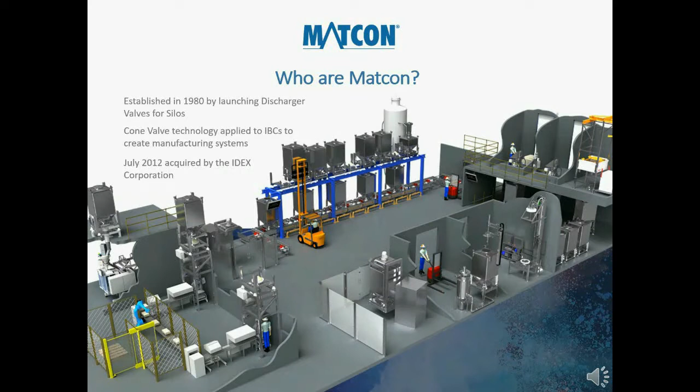Matcon are a powder handling system supplier. It was established in 1980 by launching discharge valves for silos, which were predominantly used in the mineral processing industry. The cone valve technology evolved and was applied to intermediate bulk container systems, or IBCs. These were used for batch production in manufacturing plants around the world. In July 2012, Matcon was acquired by the IDEX Corporation, based in the USA.

Matcon are the originators of cone valve technology. This technology has been used for a number of years and has a lot of benefits to the manufacturing plant. When we discharge the IBCs, the blend homogeneity is maintained, so there's no segregation. We can also handle free-flowing powders, as well as cohesive materials that tend to bridge and rat hole. We can also handle fragile products, such as tablets and cereals. The IBC system is a contained system, so it has dust-free handling, so there's no risk of cross-contamination.

Matcon are part of the IDEX Material Processing Technology Division, or MPT. In that division there are companies in the powder division, which include Matcon, Quadro and Fitzpatrick, and also companies in the liquid division, which include Microfluidics, Quadro and Steridose.

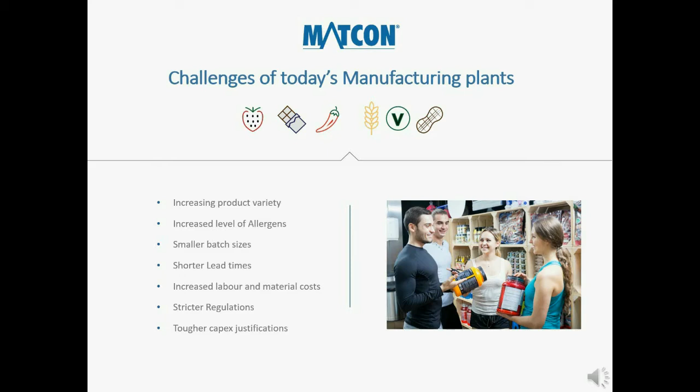The challenges for today's manufacturing plants are quite vast. These include increased product variety, driven by consumer demand. There's an increased level of allergens to handle. The batch sizes are becoming smaller and there's more of them. There's shorter lead times driven by the end client. There's an increased labour and material cost. Stricter regulations driven by regulators such as the FDA and also local regulators. And there's a tougher CapEx justification for capital investment.

Look at applying lean principles to manufacturing. They'll help us identify areas where we can become more efficient. Lean is defined as to maximise the customer's value whilst minimising waste. The wastes are defined by overproduction. This is associated with campaign manufacturing, by producing to stock rather than an order. Waiting time, waiting for a process to be loaded, unloaded and cleaned. Over-processing, using larger equipment than required to produce a smaller batch.

Transportation, unnecessary movement of people and the equipment. And producing defects unnecessarily. The biggest cost to the business is the production of too much inventory, which is associated with manufacturing to stock rather than to an order.

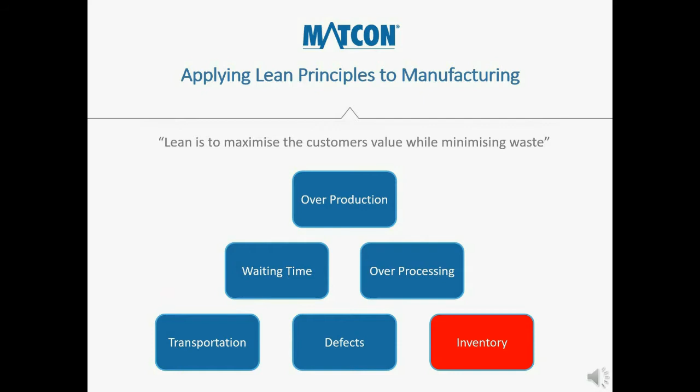Some of the essential lean principles include pull, not push manufacturing, so you're manufacturing to an order rather than to stock. Increasing the overall equipment effectiveness, the OEE. Look at flow manufacturing, like one batch being processed, one batch is waiting to be processed. Reducing the takt time, the time it takes to get from one process to another.

Improving the single minute exchange of die, either changeover time from one recipe to another. Adopting a visual aid, such as a Kanban, in the form of a paper or an automatic system, so that all of the production team are aware of what's being produced when.

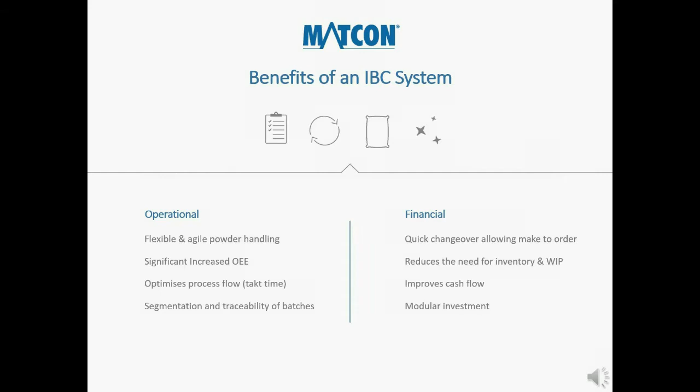Financial benefits include quick changeover, allowing to make to order, reducing the need for inventory and work in progress, improving the company's cash flow. And it's a modular investment, so investment could be made now and in the future. The IBC system is a modular system. It grows as your company grows.

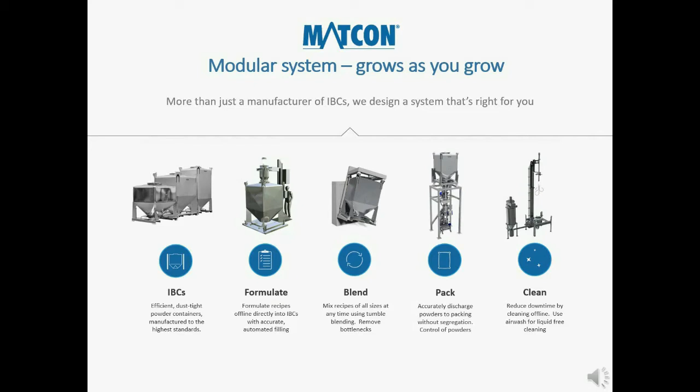The IBCs provide the flexibility in the manufacturing plant, and they're used in different processes such as formulation, blending, packing feed, and they can be cleaned offline. We'll look at these processes in more detail now.

So now we're going to look at ingredient formulation and some of those considerations when we're preparing ingredients for a recipe. Some of the considerations are the production capacity, now and in the future, the number of recipe changeovers, how frequent are they? And it's a good idea to categorize the ingredients into major ingredients, minor ingredients, and also micros, because there'll be no one system that can handle all three.

Also the dosing weight and the accuracy required, and put in a realistic accuracy required for the ingredient formulation. Are there any allergens that are to be handled? The number of SKUs, the raw material packaging form, is it 25 kilo bags, is it bulk bags? Also the flowability of the material, is it cohesive, is it free flowing? And I think we need to look at a sensible level of automation that is required now and in the future.

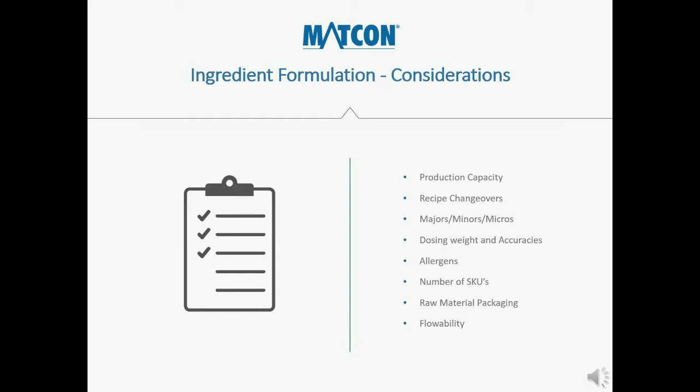There's a high throughput, we can dose up to 2 dosings per minute, and it also provides very good brand security, so the operators aren't aware of the secret formula that is being produced from the system. It also reduces errors that are associated with manual weighing and can be connected to an MES system. We'll just run a short video on the FlexiBatch Micro now.

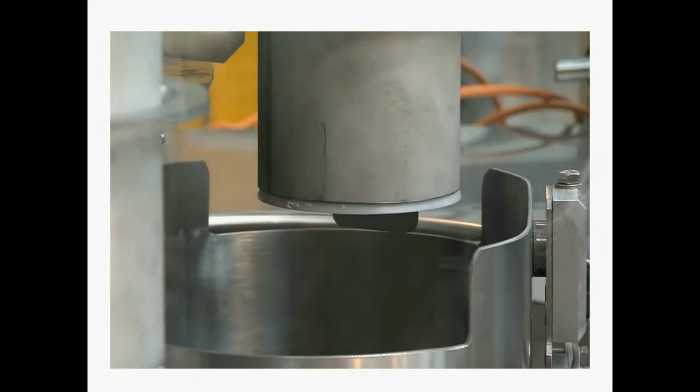This is an automated minor ingredient formulation system called the FlexiBatch. It's recipe controlled formulation which can be downloaded from an MES. This will be suited for dosing ingredients in a weight range of say 10 kilos up to several hundred kilos. There's no human error as is associated with manual weighing.

It's a quick changeover. The IBCs can change with different ingredients depending on what's being made when, and there's a loss in weight or gain in weight dosing system. Multiple ingredients and recipes can be made at the same time. We could also have batch traceability with connection to an MES system. We'll look at a short video on how the FlexiBatch system works now.

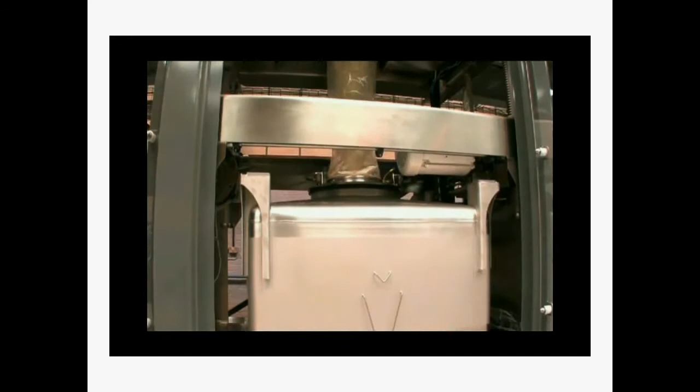So now we're looking at the major ingredient formulation, which can be automatically dosed from hoppers and silos. These ingredients could be starch, MSG, salt - the high running ingredients that are used a lot in the formulation.

It can be automated ingredient batching, so there's no human error. Because we're using the cone valve system for discharging, we have prevention of powder flow issues and mass flow issues, as well as a high degree of accuracy. It can also be connected to an MES system to provide batch traceability.

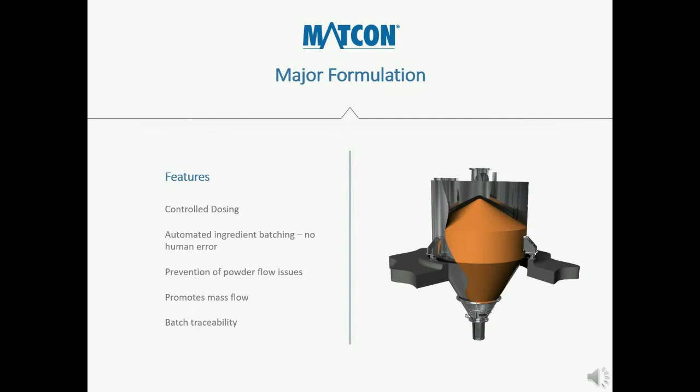These are examples of a FlexiBatch system. You've got the ingredient IBCs above, and they can be loaded up, ready for the shift's production, and changed as the recipe changes as well. Underneath we have a weigh platform with a conveyor which moves along and automatically locates the batch IBC underneath the ingredient IBC, ready to be dosed.

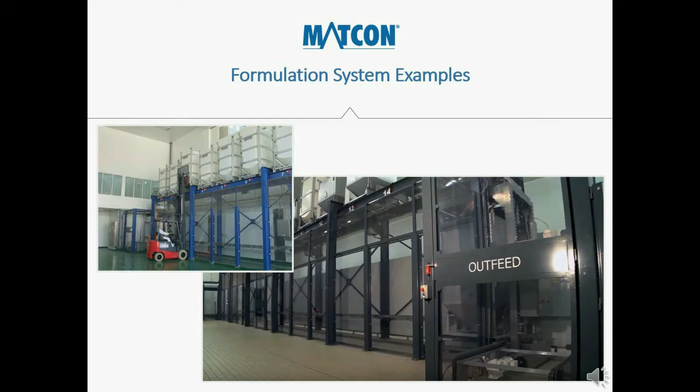This is an example of a customer site handling micros, minors, and also major ingredients. The minors and the micros are added in manually at the sack tipping station, and the major ingredients are dosed into the batch container from a number of hoppers and silos.

Mixing is the first value added process, and it sets one company apart from another. There are considerations when looking at a mixing process: production capacity, the batch size range, ingredient quantities, maximising the OEE so there's no waiting time to be loaded and unloaded and cleaned, and reducing the time between mixing the previous process and the next process.

Are there liquids and oils that need to be added? And what is the process after mixing?

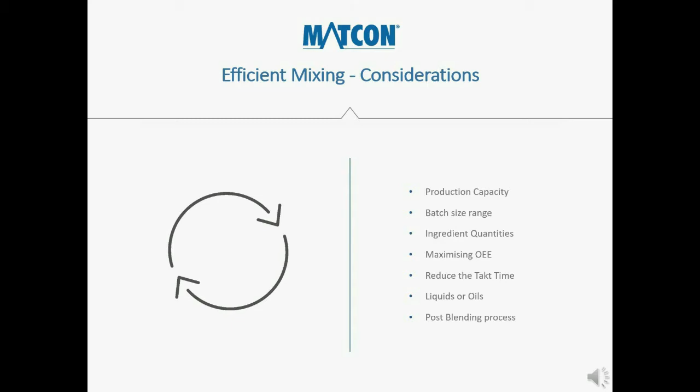Fixed mixers are generally directly coupled to a process above and below. This requires a tall building structure. Recipe changeovers and cleaning take a long time, and they're more suited for campaign manufacturing, where you make the same product range day in, day out.

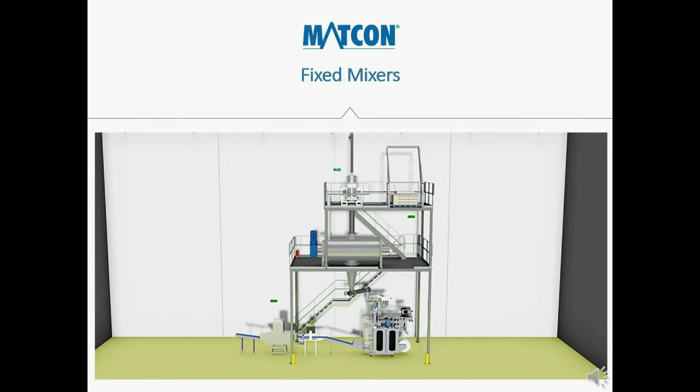The disadvantages of a directly coupled mixing system include the downtime waiting to be loaded, unloaded and cleaned, and health and safety issues, as you need a very tall structure to load the mixer and position the equipment below it. This generally leads to high inventory levels, work in progress and finished goods inventory.

It's labour intensive, very difficult to clean and time consuming. There's a risk of cross-contamination from one ingredient to another. It's quite an inefficient process, as the mixer is not always being used for mixing.

Cleaning validation needs to be done - wet cleaning and drying, then validating that the mixer is cleaned. Also, the fixed mixer generally has an aggressive type of mixing action, so it's not good for certain materials.

The IBC system is used in parallel process production. Each module - the filling of the IBC through sack tips, the IBC blending, feed to packing, and offline cleaning - are all happening in parallel. This allows for high volume manufacturing, flexibility, product integrity, hygiene, and different batch sizes. Traceability can also be built into the process.

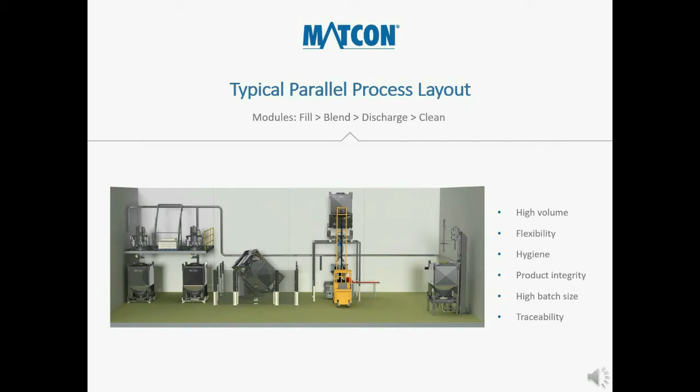Using IBC blending, the IBC is the blending vessel itself - it's loaded, clamped into the blender, blended, then unclamped and removed. This ensures it's a closed system, so there's no risk of cross-contamination and no cleaning of the blender required. This increases the overall efficiency of the mixing process, and the OEE becomes very high.

So we'll just run a short video to show how the IBC blender works.

Some of our recipes may need liquid added or have a high fat content. In this case, the IBC blender doesn't put enough work into the product to mix those thoroughly. So now we have an option for an IBC intensifier lid, which is put onto the lid of the IBC and used in conjunction with the IBC blender to mix those products. This high shear lid can operate up to 3000 RPM.

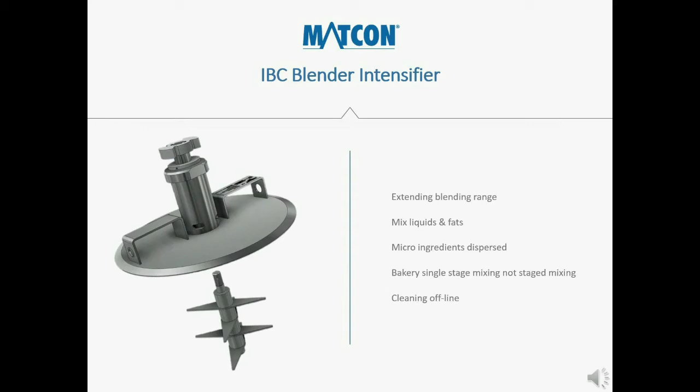We have the ability with the IBC blender to add in liquid and fats during the blend. These are added through a container or drum, and can be pumped in at up to 10 litres a minute, so it's a contained addition during the blend. We use the high shear to mix the powders and the liquid together, with no need to open the blender up and add liquid, potentially risking contamination.

We'll show a video on how the liquid addition system works now.

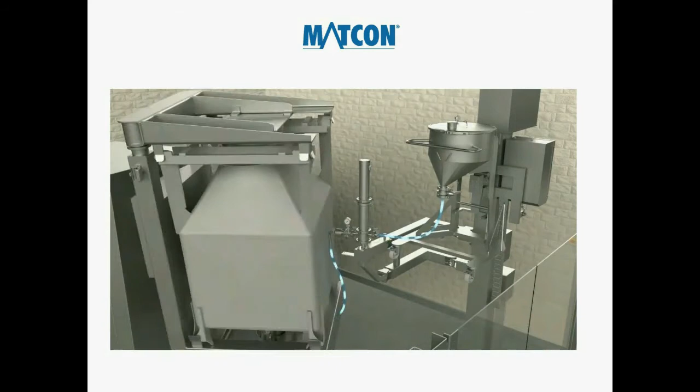We'll look at a comparison between a fixed mixer using a sequential process and an IBC blender using a parallel process. The example we use is a sports nutrition manufacturer, but it could be any manufacturer in any industry, because this is typically what we would see.

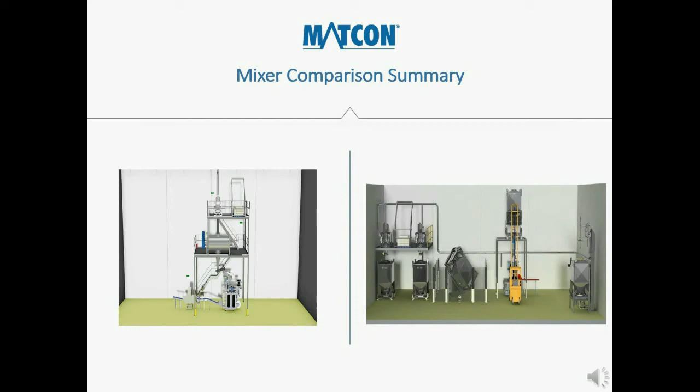Packing feed is a critical part of the process. You need to maintain the blend homogeneity. There needs to be a control feed to the packing machine so you get consistent bulk density and consistent packing weights. The feed system needs to handle different flowing powders, be automated to optimize efficiency, be a dust controlled system, and allow complete discharge. You don't want to leave any product in the process above.

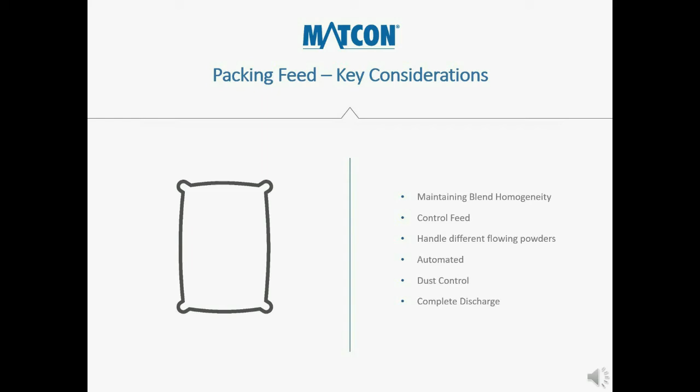Matcon's cone valve discharge technology provides many benefits when we're feeding material to a packing machine. It gives a consistent density of the product by controlling the flow, so you get consistent pack weight in the packing machine. You also don't get any powder handling problems, and it's an automated, dust-free process.

Let's look at a short video on a typical packing feed example now.

As well as automated cone valve discharge, Matcon also has a manual cone valve discharge, where we use a lever to raise the cone valve into the product flow into an IBC. Compared to a butterfly valve system, this can discharge free-flowing powders such as sugars, salt, 3-in-1 beverages, detergents, and plastic granules. Unlike the butterfly valve system, which promotes core flow and can't prevent rat-holing or segregation risk, and can't discharge powder fully, with dusting at the base of the valve underneath the IBC when closed, the manual cone valve system promotes mass flow, preventing rat-holing and segregation, allowing full discharge with a contained powder discharge.

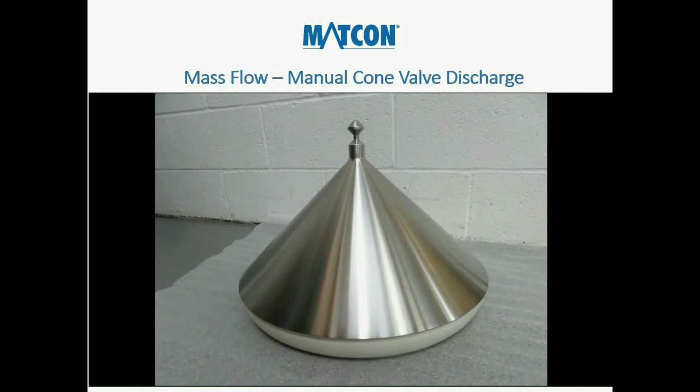This is an example of the IBC cone valve system feeding to packing, and the discharge station for that can be located on a frame above the packing machine or on the floor above. It provides a constant feed to the packing machine to maintain the density, consistency, and quality of the product.

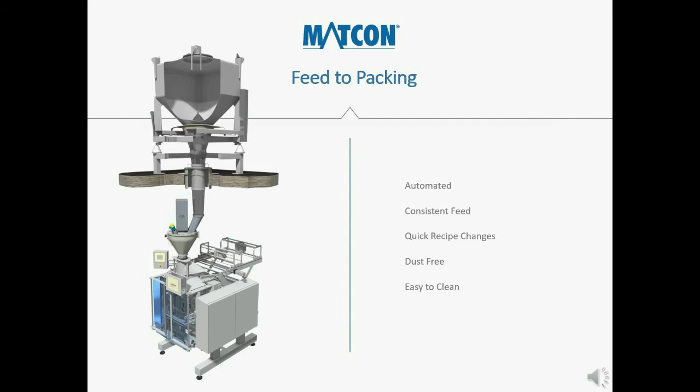This shows a B2B packing system, or a powder packer as we call it. Here we're dosing directly from the IBC into a bag, box, or drum. Typically the packing size would be anything from 5 kilos to 25 kilos, but this is designed to be quick and easy to dismantle, change recipes, and clean.

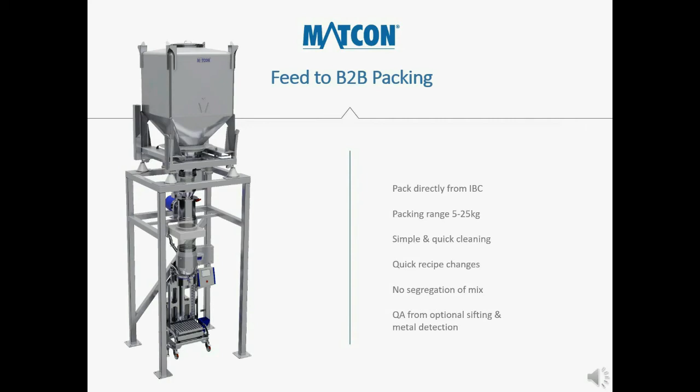In summary, the Matcon IBC cone valve technology is used to maintain blend homogeneity. It can control and discharge free-flowing powders, very sticky cohesive powders, handle fragile products, and it's a dust-free handling system.

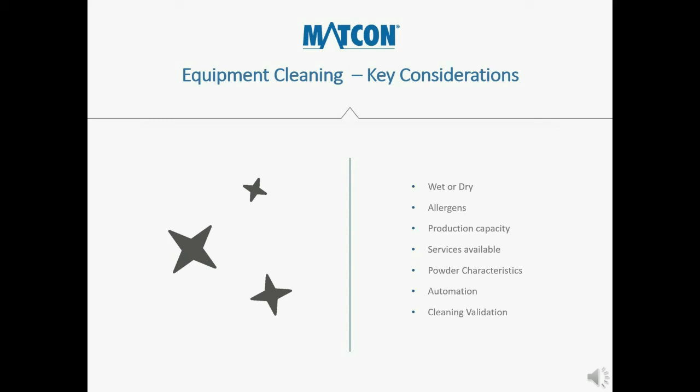Equipment cleaning is obviously a very important part of the process. Some key considerations: some industries, such as dairy and infant formula, stipulate that most cleaning processes need to be dry so there's no risk of bacteria growth, whereas if you're handling allergens and flavours, it needs to be a wet clean to ensure thorough cleaning and drying. You also need to consider production capacity, how many recipe changeovers there are, the powder characteristics, and whether you need to automate the process now or in the future. Also, how does your QA team need to validate the cleaning process, whether it's a swab test or other means. As we mentioned, the IBCs themselves are cleaned offline.

This is an example of an IBC cleaning system with water. This could be manual or fully automated. We're using a high pressure spray ball lowered onto the inlet of the IBC, and we've also got a number of spray nozzles around the cone valve area, which raise and lower the cone valve during the process. This is a validated wash cycle, where we normally rinse the IBC with water, add detergent, do a final rinse, and also do a drying cycle.

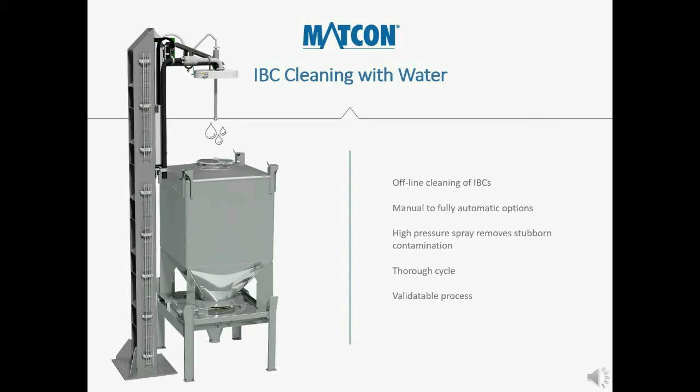As well as the water IBC cleaning system, we have a dry air cleaning system. This is particularly relevant to the dairy industry and infant formula industries, so they can't risk any contamination or bug growth with water, so they much prefer to use dry air. This uses a spray nozzle with a compressed air supply and filter supply that lowers down onto the IBC, and any airborne dust is ejected out of the bottom of the IBC with a dust collection system.

It's a fast cleaning system. Typically this would take 6 to 10 minutes to turn around a clean IBC, and it's a validated process which the QA can use.

So here we show a typical process flow. This is in the beverage industry. This could be a single floor facility or with a mezzanine or frames, showing separate sack tipping of the ingredients into an IBC through a sieve, separate process of IBC blending, feeding to packing and offline cleaning. A very good example of a parallel process efficient plant.

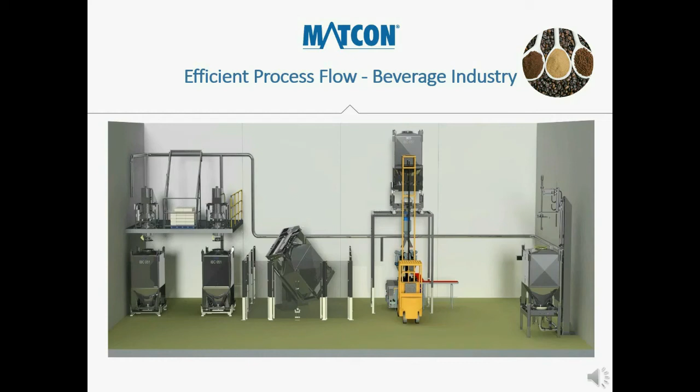Shows an example of an efficient gravity feed plant for an infant formula production. On the top floor, we're separating the zones. We've got the raw materials handling part coming through on the left, through the low hygiene zone to the high care area, where the operators decant the sacks into the IBCs down below in the middle floor. In the middle floor, we've got IBC movement, IBC blending, IBC discharge, and off to the side, we've got IBC washing.

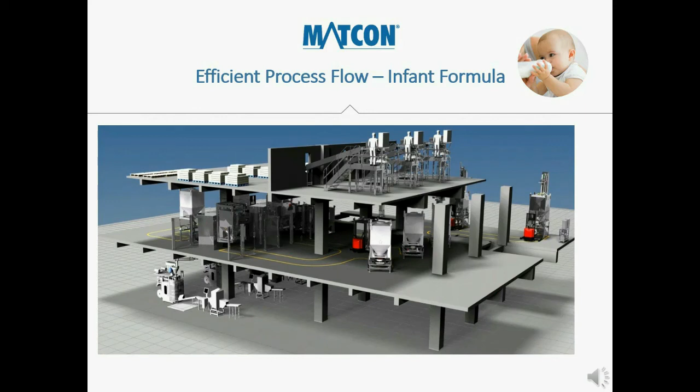So we're using that as a medium care area. Then that medium care area is feeding into a high care area down below, which is the packing hall. So a very good example of separating the zones to reduce the ongoing utility cost and maintenance.

Now look at a case study video for a company called Vetra, which is a 3-in-1 beverage manufacturer in Malaysia. They installed a Matcon system in their existing factory.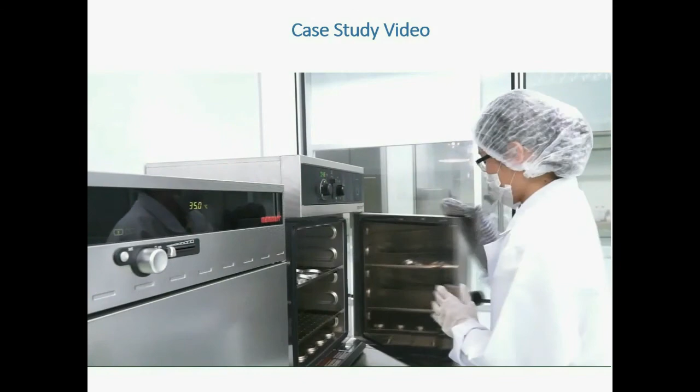I'd just like to summarise the benefits of the Matcon IBC system and how it's used to optimise efficiency and capacity. These are split into operational benefits and also financial benefits. The operational is the parallel process increases flexibility and agility. In a lean perspective, we have a high overall equipment effectiveness of the equipment.

It reduces the process flow between processes. It reduces the takt time. All the cleaning is done offline, dry cleaning or wet cleaning. Traceability and segregation of the batches is achieved.

Financial benefits can be significant. There's quick changeover time for recipes, allowing make to order rather than make to stock. This reduces the need for inventory and work in progress, improves the cash flow of the company, and the investment is modular, so as and when the production demand increases, you can increase the equipment.